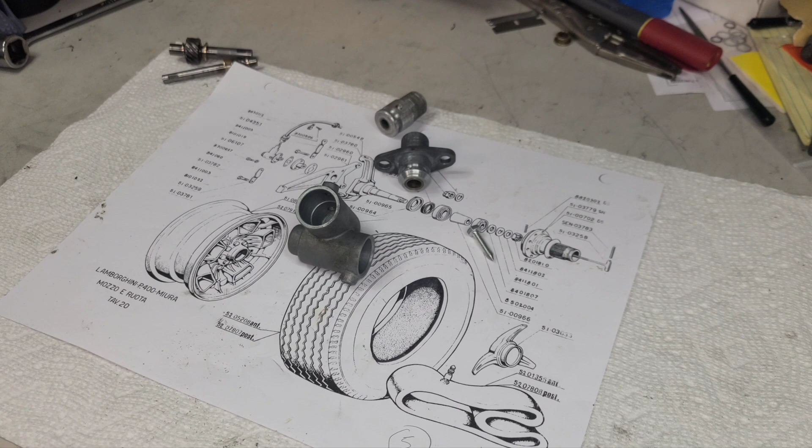I'm thinking that this might be part 4 of 4 for the box itself. So let's get going on it. What do we need to do now?

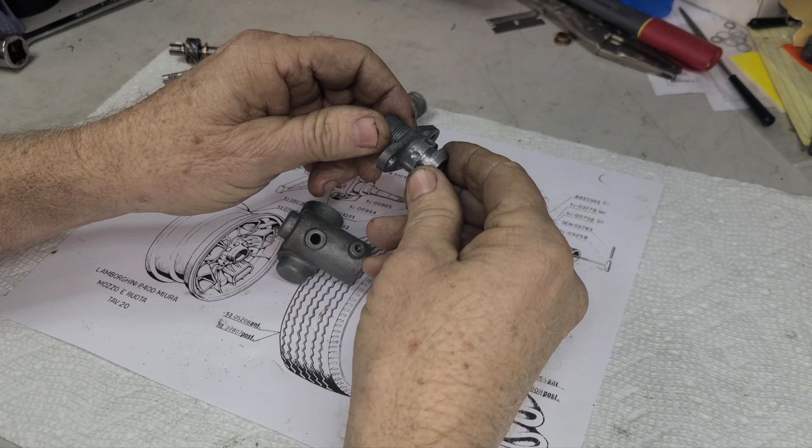We're going to need to mill in some holes. Remember, this had been positioned in a different manner, and we want to go back to the factory, but this hole is not in good shape. We're going to then spin it 180 from the original, which will have the same lineup, no problems. And then I'm going to bore a hole in here.

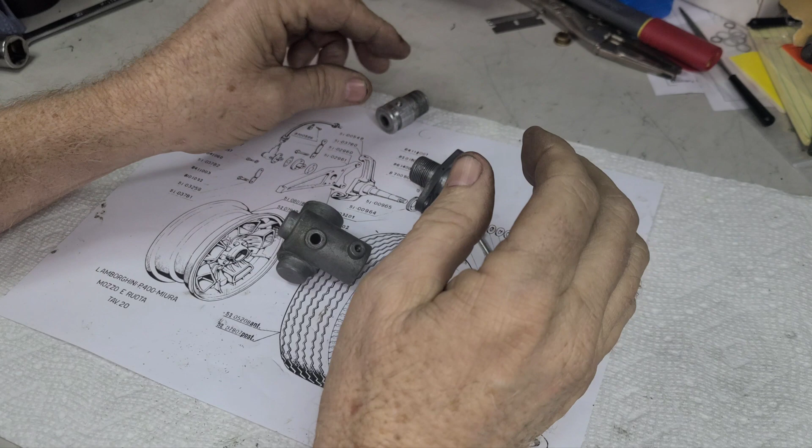Where exactly do I put the hole and how do I mark it? And then the same right here. This is kind of oblonged out a little bit, so I'm going to go with a 3mm hole, and I'm going to make the extended pin screws go into that.

So I'm going to have it a nice precision fit. This hole here, I'm not going to use. I'm going to go over here and bore right here for the location. So what I want to do is insert this inside, and something like this.

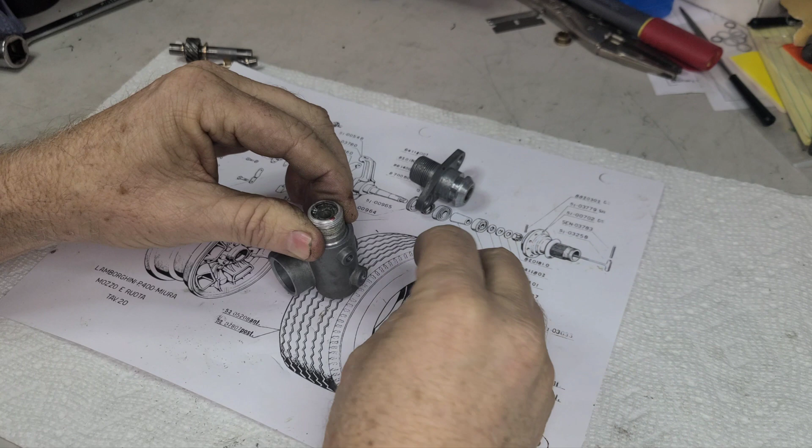I want to line this up to where it's going to work, and then I'm going to put this guy inside it. So let me go get a little wrench. I'll be back in a second.

We're back with a little ratchet here. It doesn't really matter, I'm just kind of trying to be uniform with everything. Okay, so I just put it on the lathe. You gotta use a lathe every day, keeps the doctor away.

And just for fun, do that. So we got a nice little tip on this, and let's see about fitting this in here. Yep, it's all the way down.

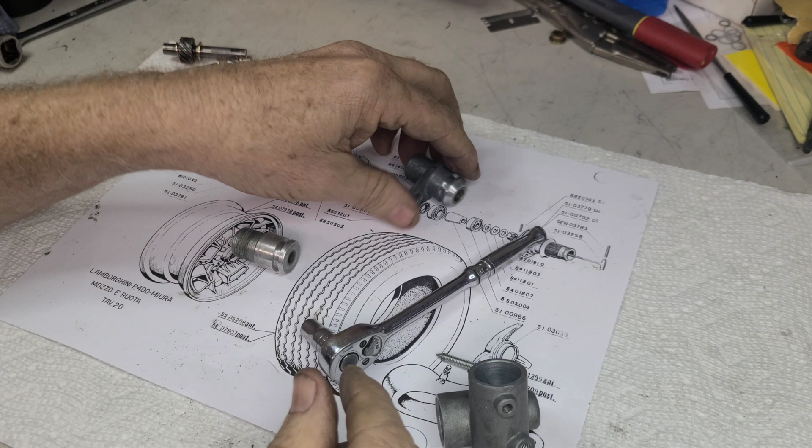Okay, so we got a mark here. Probably could have gotten a little more aggressive, but anyway, we got the mark there, and then I'll finish it off by using a center punch. But at least I had that marked, I know exactly where I need to center punch it.

Okay, good enough. All right, so now on the other one, we need to go 180 from the original. So that's what we're going to do right here. And again, I want this down tight when I do this.

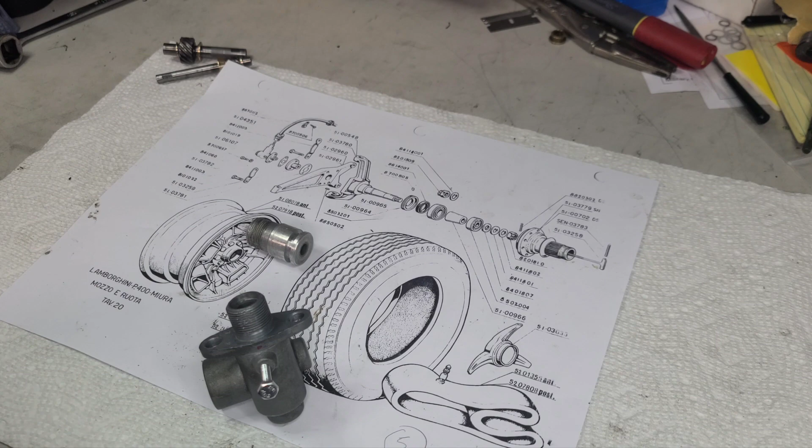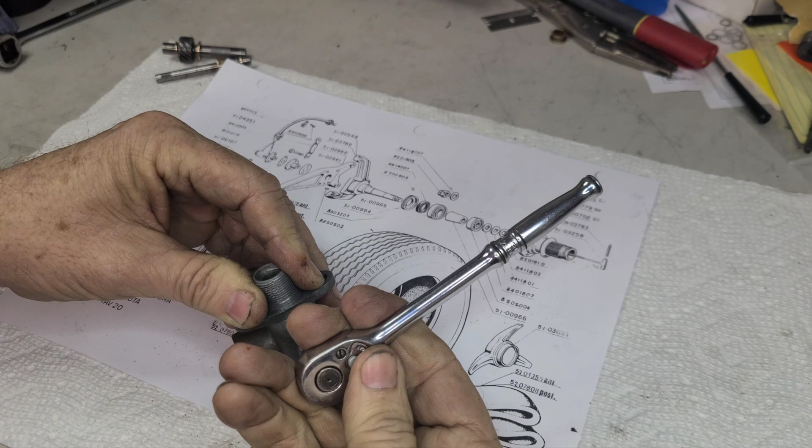Let me make sure I've got this set right. I thought I said I had it right. I guess right is wrong. Okay, I have it there.

Luckily we're just going 3mm, not any more than that, because otherwise we would really be getting into this area here. So we don't want to do that. Okay, all right, on to the next.

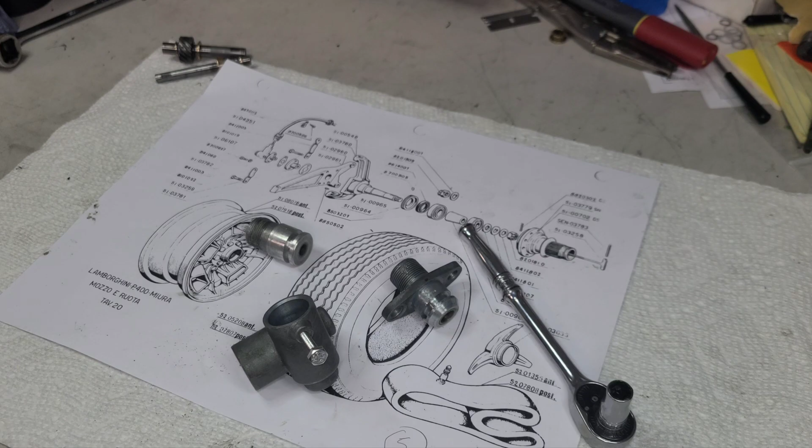All right, have my end mill in here. I'm going to be putting in the hole in this piece and then also in this piece. So what I want to do is try and simplify things. On the milling machine, I made a pointer so that I can go ahead and find that center punch mark right away. I wanted to make sure I get that right on the button.

And this is going to make it much easier. I just take that pointer off and the end mill's ready to go. You can see I'm going to have some wall between that groove for the O-ring and the end mill hole. I'm going to go slightly beyond the depth of that O-ring groove so I have good stability, and that's it. On to the next.

Okay, so this one is completed. All right, I'll put on the next one, and that'll be it for the holes.

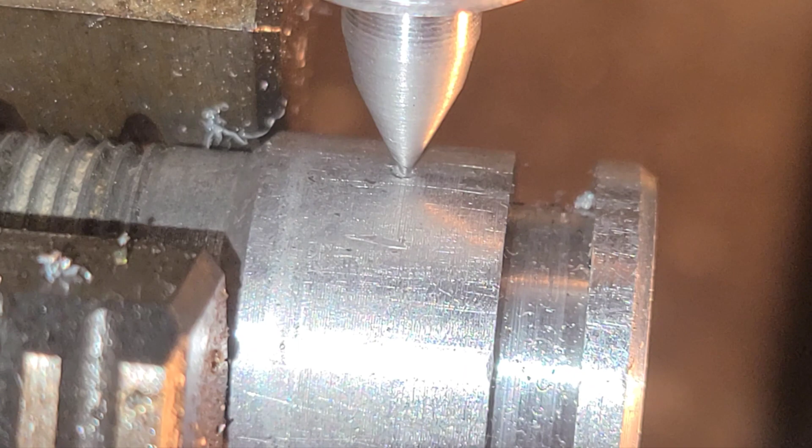Second one in. This is going to be a little shaky, but just to demonstrate lining it up. I put the camera on it, it's magnified a little there, and I can move my mill over a little bit. See, bingo, got it right there. I already have the center lined up. We're good.

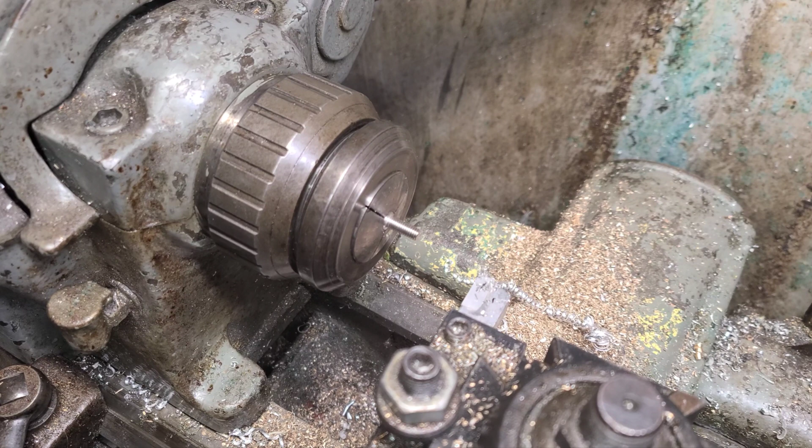Okay, I'm going to start the process of modifying these screws to make them extended tip 4mm.

All right, I think that's all I need to really do on the lathe, and then I'm going to take it off and finish off the threads off the lathe.

Making some washers, but really they're spacers. I don't want the pin going into the aluminum ends to actually press on it. I just want them to be held in place, because if we press on it, it's going to make things a little bit off center. We don't want that.

Okay, calculated it, and I need two 50 thousandths thick washers, spacers, whatever you want to call it. So I'm going to cut these off. Almost getting to the point of putting this thing together.

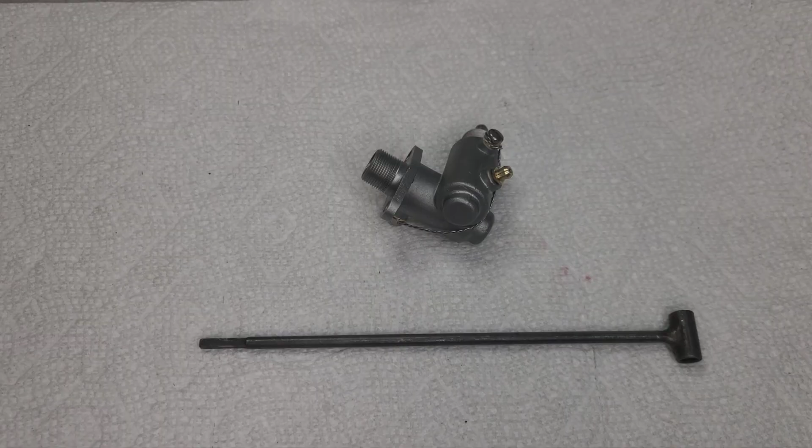We'll keep this going. If you're interested in these cars or any old car, it would probably be a good idea to just review some of these videos. Check it out, see what the weaknesses are. Maybe look at what you really like about the car.

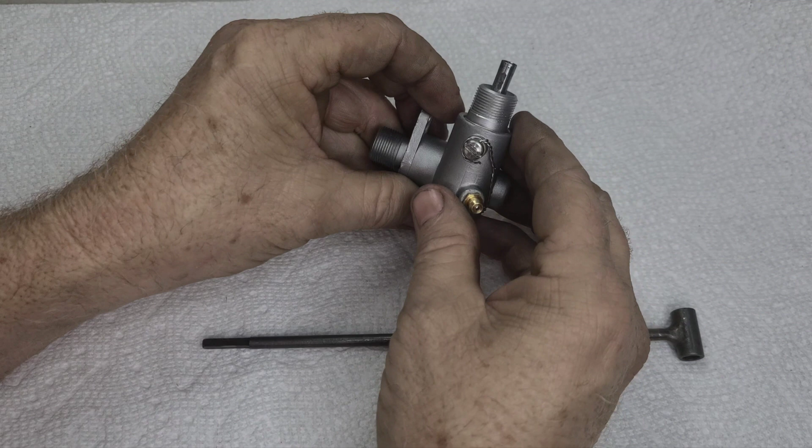How about that? So we have it together here, it's all kind of cleaned up. I greased it, I have the safety wire on it. So essentially, if this wants to turn counterclockwise, it's going to pull on this, and when it comes down here, it's going to want to turn it clockwise and tighten. So that's the whole idea behind the safety wire, we don't want these to come out.

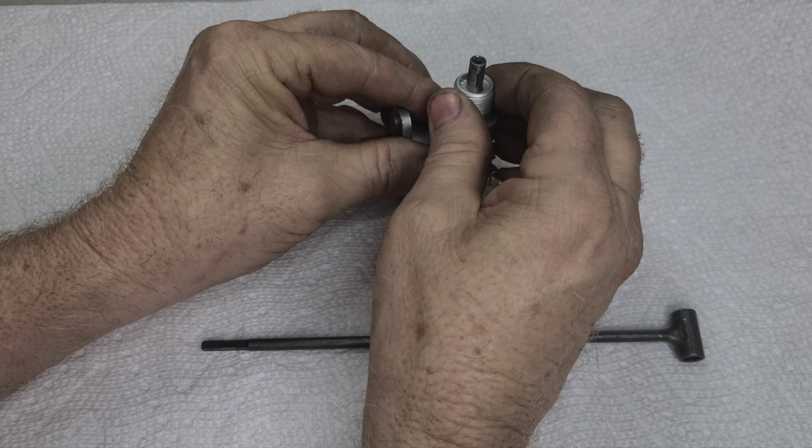The other thing, this extended pin on this screw, it is not forcing onto this, it is only holding it in place, and this is wanting to float right in that center position. I'm not pushing any force on it at all, same with the other side. That's another thing I wanted to do, because they just jammed the screw in and tightened the heck out of it, and that's just placing too much stress on these. Anyway, enough said.

I'll just put the little guy in here and we'll just spin it for fun.

How about that? All right, so we're in the car, and now we're going forward, and we are now going about 0.001 miles per hour. How about that?

Well, that's a start. Okay, another thing we need to do is this rod that the hub spins into the box, and you can kind of see right here, she's shot, she's worn out, and I need to make another one. They're not available, so that's going to be another future video, coming up in the very near future.